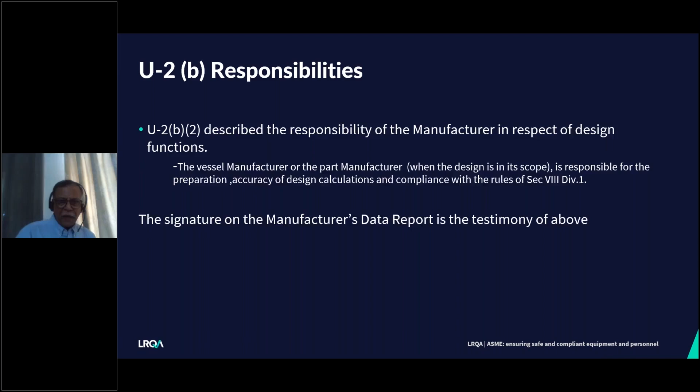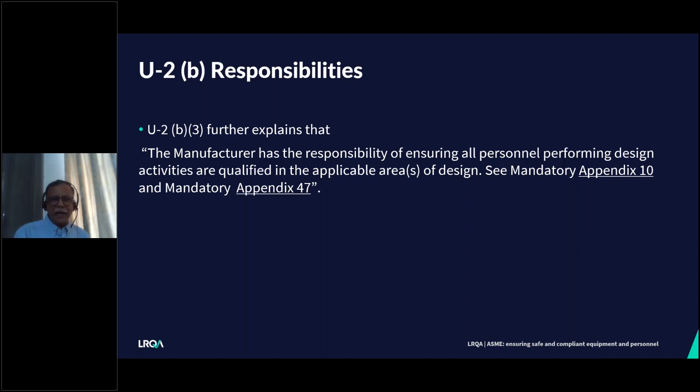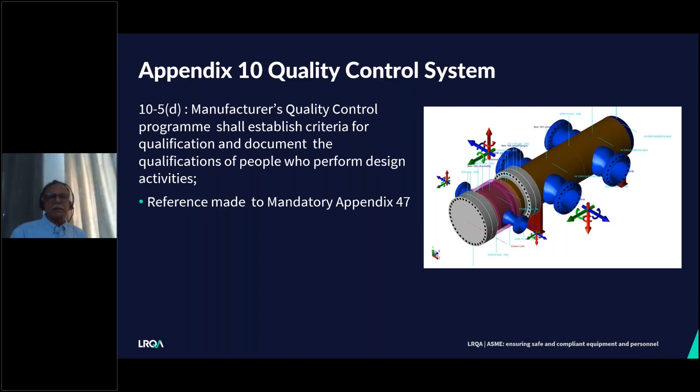And further, U-2 also says go to Mandatory Appendix 10, which is nothing but a quality system standard for a D1 pressure vessel manufacturer. Your quality manual is based on that quality standard, Appendix 10. And Appendix 10 is in turn referring to Appendix 47, which is the new addition to our Section 8 Division 1 code, which is talking about competency of designers. So this is Appendix 10. You all must be familiar with that, where they are making direct reference to Appendix 47.

Now, before going to 47, again, let us have a quick look at a couple of definitions. Actually, it is there in Section VIII Division 1, but we need to understand these two entities: certifying engineer and designer. Certifying engineer is an engineer or other technical professional, duly accredited and qualified to practice engineering activity. This is the definition we have taken from the code directly.

And designer is a person who is qualified to design pressure vessels in accordance with Division 1, that is Section VIII Division 1, by demonstrated knowledge in code requirements and their ability to select the correct design formula. So just keep these two definitions in mind. It will be useful while going through the remaining part of Appendix 47.

So coming to 47, it says that the manufacturer shall designate a designer, engineer, or certifying engineer. Now, please remember these three terms: designer, engineer, or certifying engineer. They are not a kind of business title or anything. They are just presented here to differentiate between qualifications. Engineer is more qualified than designer, and certifying engineer is more qualified than engineer. Just remember that much.

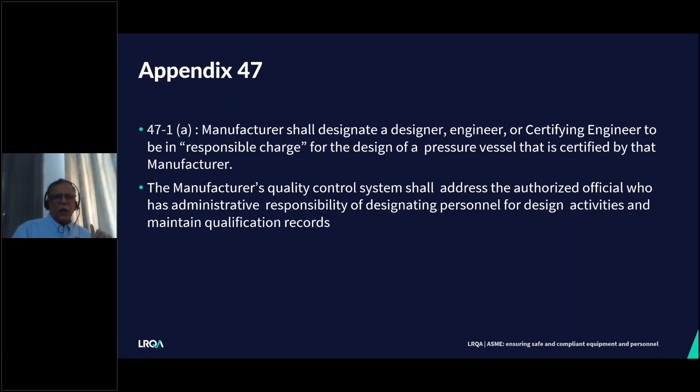And one of them has to be designated as a responsible charge. That is what Appendix 47 is saying. We'll come to responsible charge a little later. And the manufacturer's quality manual should very clearly say which administrative position should actually designate the responsible charge, which top management function will designate the responsible charge.

Now, what is the responsible charge? It is nothing but a person who performs all the design activities, or traditionally we call designers, who are doing all the design activities and approving the design or controlling the design activity performed by others. So we talked about subcontracted design. In case we subcontract, there should be someone to oversee the activities, to supervise the design activities and control those activities. That is what a responsible charge is. So a responsible charge can be a certifying engineer, an engineer, or a designer, as I said in the previous slide.

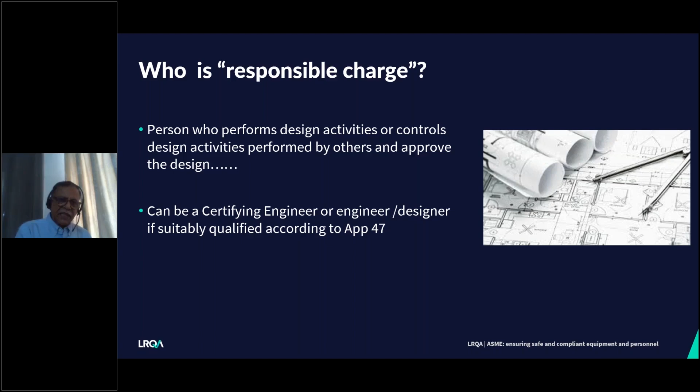So a responsible charge is a technically qualified person who is involved right from beginning till end of a design process. It is not merely review of the design, like somebody preparing a design and giving it to a person to review and approve it. No, that is not the duty of a responsible charge. A responsible charge is directly involved with the design process.

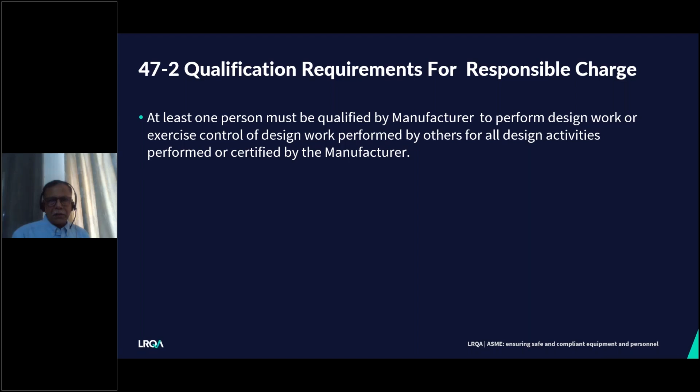Now, if we go to 47-2, that is the second part of Appendix 47, they say the manufacturer should engage at least one person as a responsible charge. You can have multiple responsible charges. The larger the organization, it is expected you have a number of qualified designers to do the job. But if not, at least one you have to designate and qualify. And they have given some of the requirements.

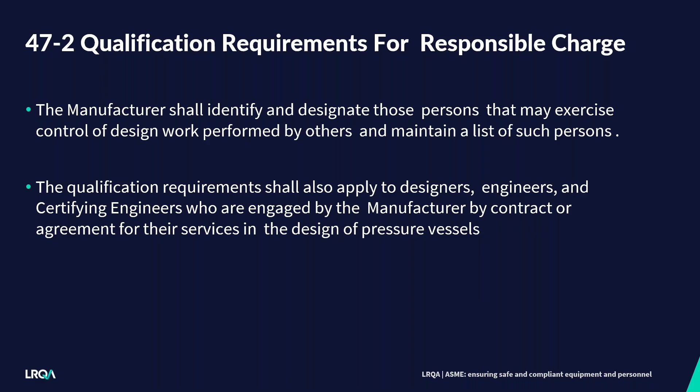Basically what they say, again, it's the responsibility of the manufacturer to identify and designate those persons that may exercise control of design work performed by others. So it is not just identifying the responsible charge, you also need to identify whether they should control others' activities; that needs to be mentioned in their quality program. The qualification requirement shall also apply to designers, engineers, and certifying engineers who are engaged by the manufacturer by contract. So even if it is a subcontracted designer, we still need to apply the same qualification requirement.

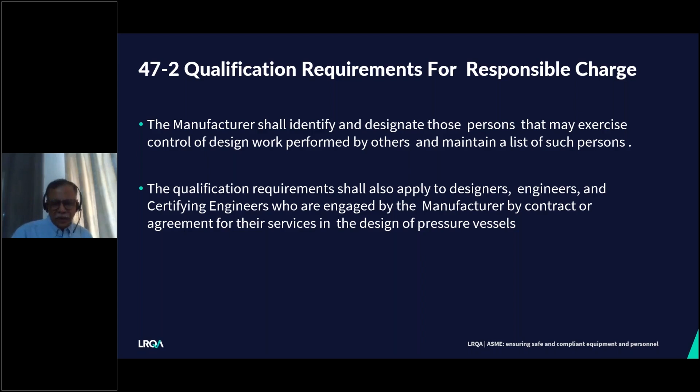Certifying engineers, as I said at the beginning, from the definition, are the people who are accredited to do design. Actually, they are licensed, registered, or a kind of chartered engineer who are professionally qualified or recognized to do engineering activities. So there are 4 routes.

There could be a registered professional engineer. Many of you know that in the United States and Canada, they have a process of registering engineers, so they call them registered professional engineers. They are qualified to do this. They can be a responsible charge. Or certifying engineers who are members of the International Register of Professional Engineers. This is the second route.

Outside USA, this is quite popular, International Register of Professional Engineer. The third route could be a member of Asia Pacific Economic Cooperation, APEC in short. So if an engineer is an authorized member of this body, he is qualified to do a certifying engineer's role. And the fourth route is basically membership with the European Federation of National Engineering Association, FEANI, which is quite popular in Europe. So any of these 4 routes can recognize someone as a certifying engineer.

Moreover, the certifying engineer shall have at least 4 years of design experience, design of pressure vessel experience. Then they can be called responsible charge. Now coming to engineer. Engineer is not a certifying engineer, so they are not registered professional engineer, but they have a technical degree of at least 4-year duration. Regular university degree in engineering, science, or technology, and they must have 4 years of design experience in pressure vessel. So engineer is a qualified engineer. We call Bachelor of Engineering with 4 years experience in pressure vessel design.

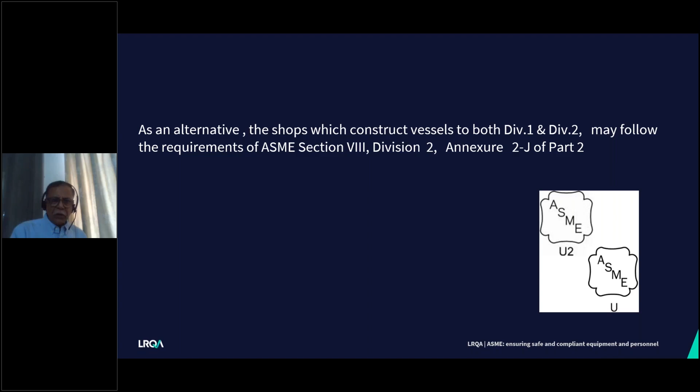There is another alternate method for designers. Even if they don't meet the educational qualification requirement of 2-year diploma, still they can be considered in case they have 10 years of experience in pressure vessel design. As an alternative, there are some shops running both the code stamps. You have a certificate of authorization for both Division 1 as well as Division 2, U2. Division 2 also requires certain qualification for designers. So you need not maintain 2 separate systems for Division 1 and Division 2. You can have a combined one meeting the requirement of Division 2, which is of higher order.

Now, if we look at paragraph 47-5, till now we have seen the education qualification and experience for a responsible charge. Now, over and above, they need certain additional experience in some of the design activities. Here you can see there are 5 activities listed: performance of numerical analysis, fatigue analysis of pressure vessel, design due to dynamic seismic reaction, design of quick actuating closures, and design not specified in this division. We typically call it U2G. You have to go for an alternative design method. So any one of these 5 design activities requires additional experience of 2 years and

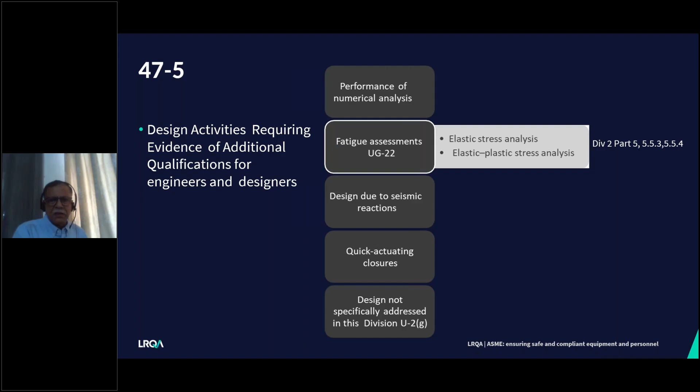additional qualification. So till now what we have seen, the responsible charge, the person who is responsible for approving design, should be either an accredited certifying engineer, or an engineer with engineering degree of 4-year duration plus 4-year experience, or diploma holders with 6 years experience. Plus they need additional training and experience in these 5 design activities. If a responsible charge is not involved with any of these 5 activities, they don't have to have this additional qualification. They can do the routine jobs normally. But in case they are involved with any one of these activities, they need to be qualified additionally.

So if it is a numerical analysis, they need to have 2-year additional experience in conducting design analysis using numerical analysis softwares, and they need to be trained by the developer of the software program, or by a license holder from the software developer, or alternatively by a certifying engineer. But they need this training plus 2 years additional experience for numerical analysis.

Similarly, when it comes to fatigue assessment, they need 2 years of experience in fatigue analysis of pressure vessels. But this is important, please note, when the fatigue assessment is a requirement in your design, only 2 years additional experience is not good enough. You need to work under the supervision of a certifying engineer. So this is where Section VIII Division 1 is mandatorily asking for a certifying engineer to be involved in the design process if there is a fatigue assessment.

And for other design activities, like quick actuating closure or U2G kind of design, additional 2 years experience is good enough. You don't need any additional training.

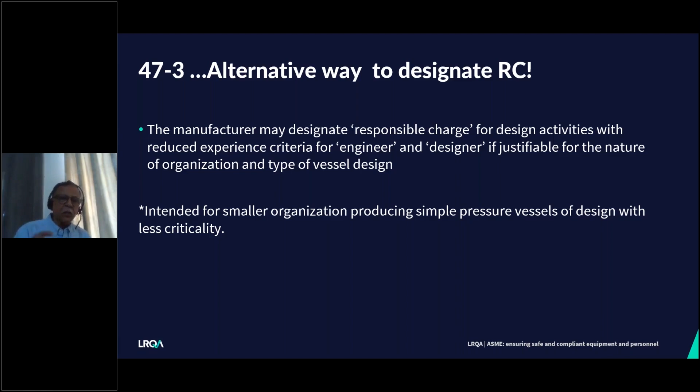Now there is another option given, and this option is given mainly for small shops who are manufacturing simple pressure vessels. It's not complicated vessels. Designs are all very standard and simpler. There you can actually alter the experience requirement. The education qualification requirement remains the same as we have discussed for certifying engineer, for designer and engineer, but the experience part you can soften down, you can reduce it actually, because it's a small simpler job. You can manage with lesser experience. Only thing, you need to address it in your quality program.

And now what to do with those people? Till now we have talked about responsible charge, meeting the requirement of education, meeting the requirement of experience and additional training, all fine. But what to do with those who are not meeting those requirements? So don't worry, we don't have to remove them from the job. We can still engage them for the design activities for which they are comfortable. In a sense, they have been doing certain work activities. They can continue doing that work, right?

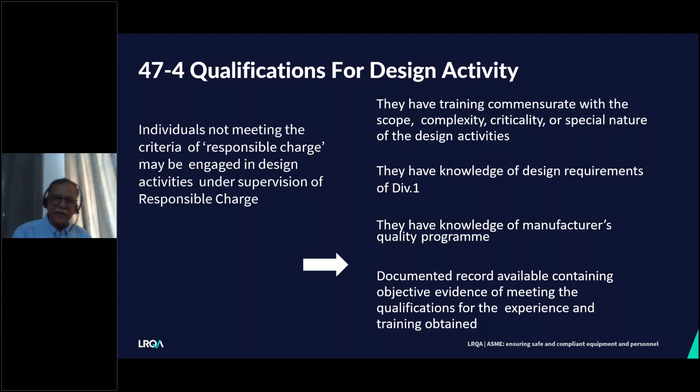Only thing, they need to do that work under the supervision of a responsible charge. You have already identified a responsible charge. So make sure these people who are not qualified as a responsible charge still continue doing the job under the supervision of the responsible charge. And someday definitely they will build their CV, they will acquire the required experience, and they themselves will also qualify as a responsible charge. So don't worry about it.

47.6 is talking about manufacturer's responsibility. It is very simple. You actually need to identify the qualification criteria depending on the type of job you do, the criticality of your design. You need to set the criteria and document it in your quality system, right? The next step, you should identify the people, see how they are meeting those specified requirements. If they are meeting the requirement, declare them as a responsible charge, or designers who should work under the supervision of a responsible charge.

And additionally, you need to set the requirement for a frequency to maintain the qualification. You know, you are qualified today doesn't mean that you remain qualified forever without doing a job. So you need to tell them to do some design activity once in a while, maybe once in a year, once in 2 years, up to you. You define the duration, put it in your quality control system.

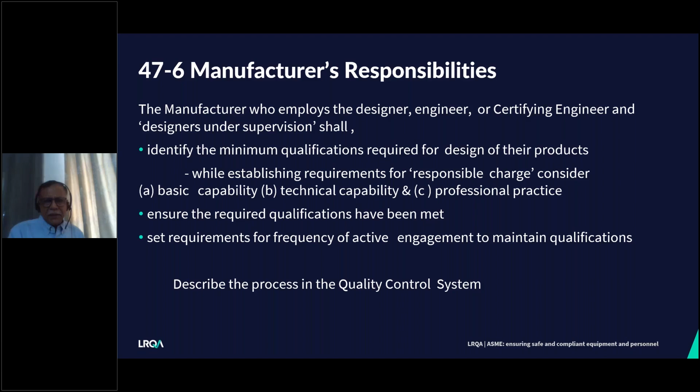So that's it from my side. I tried to explain the requirements in a simpler way, and if you have difficulty, you can always talk to our AIs and find out a system which is workable for you. And I'll be happy to receive any feedback further, any questions if you have.

Thank you very much, Partha, for the very technical and informative presentation on Appendix 47. We got some frequently asked questions relating to this topic. So the first question, Partha, is how do we document the qualifications of responsible charge and other designers?

Yes, thanks. This is a question which is asked many a time, especially during the joint review. How to present, how to demonstrate the capabilities. So I will suggest keep it simple. Don't worry too much. There is one document you need to designate the responsible charge.

You can design a format of your own where you will say that so and so person is designated as a responsible charge, and you can just add which activities he is qualified for. As I mentioned during my presentation, certain activities require additional qualification, like numerical analysis. Mention that on that piece of paper, and then a responsible, senior person in the company should sign that. If you want a format, there is a format available on the ASME website.

I have given the link here. If you can go through the website, there is a white paper. They call it ASME white paper on Appendix 47. I think you can go through it. It is an interesting piece of document. And there they had given a format of this designation letter. The format is not very ideal, but you can definitely modify it.

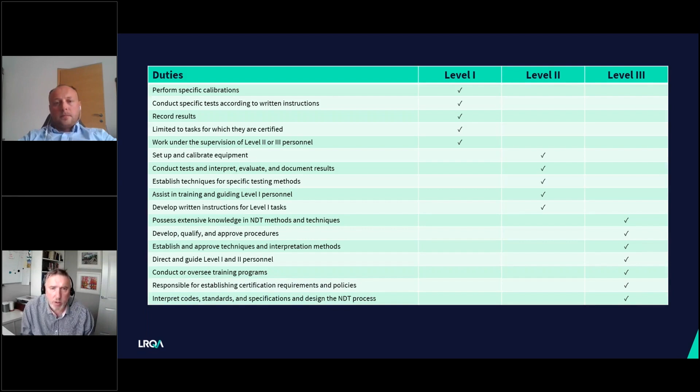Yeah, very clear. And just to be quite clear, the level 3 also perform all the duties of the level 1 and level 2 as well, don't they? Correct, yes. Okay, if we can go to the second question then.

So the second question relates to a company which already has an employee holding ASNT level 3 qualification for radiography, penetrant testing, ultrasonic testing, and magnetic particle testing. And the question is, what additional examinations are to be included in the SNT written practice to qualify them as the company level 3?

Good question. So to be appointed as a level 3, the company has to lay out the requirements in the written practice. And in addition to the certification already in place, the level 3 has to conduct a specific examination, the practical examination, plus the additional procedure writing to be aligned with the code requirements. Thank you very much, Carl.

And the third and final question relating to NDT is from a company whose level 3 has the certificate valid until 2025 based on an earlier code edition of ASME. So the question is, is it necessary to administer additional examinations as per ASME Section V, T-120, Article 1 immediately, or can they wait until their next recertification?